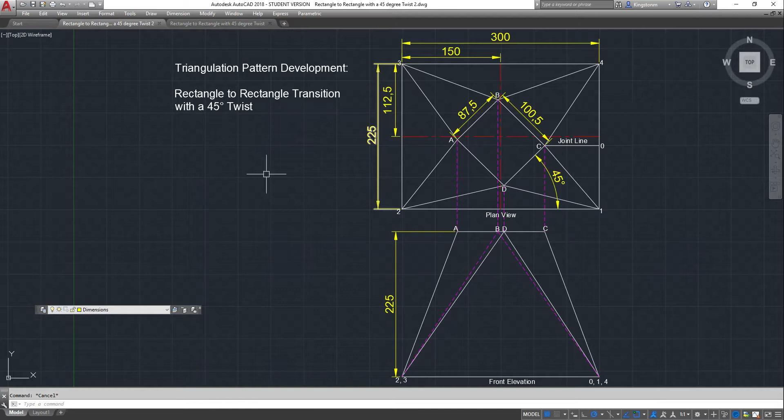I'm just doing the pattern in one full piece because that's how I want it drawn. But you would have to make it in two halves and either butt weld it together or spot weld it together or join it, however you so choose to do it. So that's the outline. I've already redrawn it here.

I've started to put my true length lines in. You will remember having drawn some of these already, or you may not remember that these lines here, say from 3 to A in the plan view, must be put over the vertical height or the true length height in the front elevation.

So what we do is we take that length there. I'm just going to do it with the computer. So it has a length here, that line of 144.54 millimeters. So you would set your compass, your dividers.

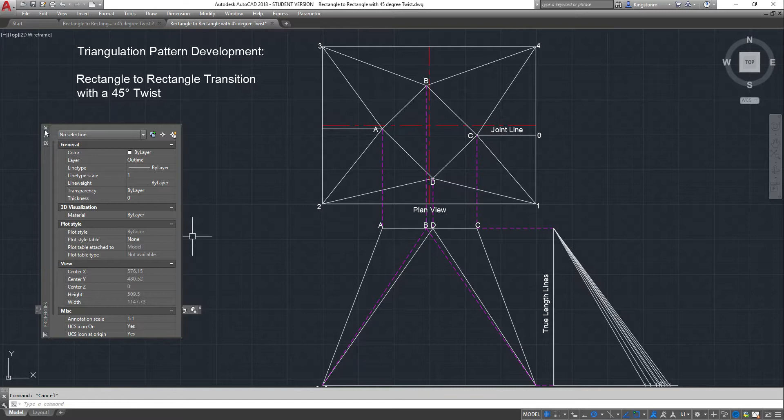And I'll just demonstrate that here. So circle here, what they say, 144.54 millimeters. So you can see the circle, and you would only draw a small arc across the baseline like these little lines here, but on this computer or on an AutoCAD you have to draw a full circle and then trim it back.

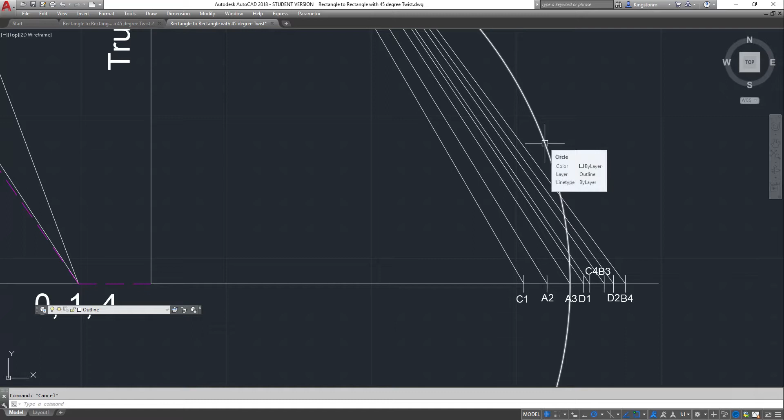So that circle is drawn in from A3, this A3, which is this intersection point right here. We run our line all the way back to our vertical height line, and that gives us our true length line of A3 when it's laid out properly for a vertical height.

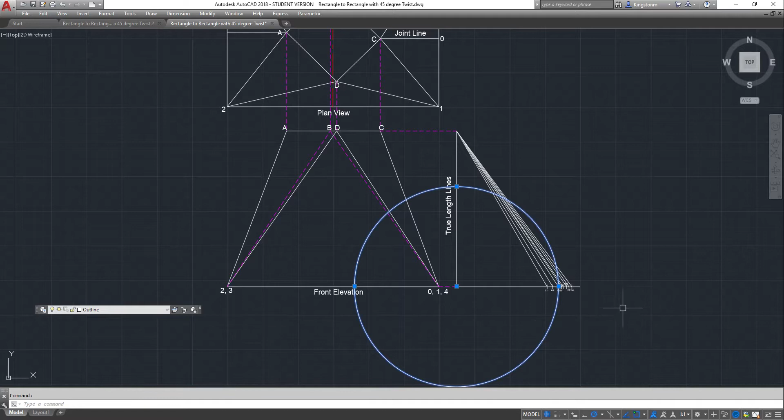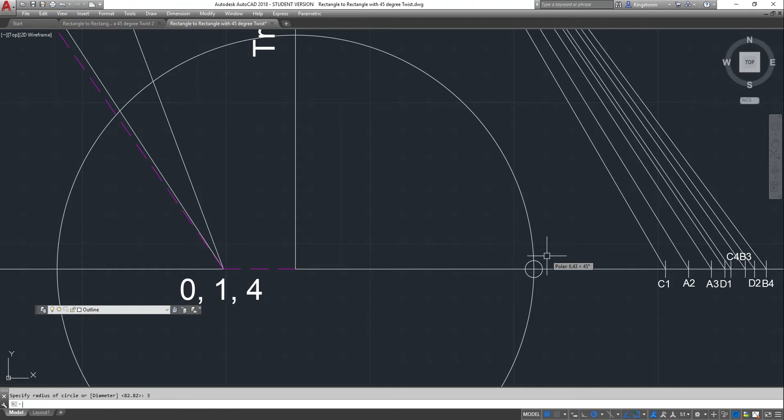So that's those done. I haven't done the joint line. Our length of our joint line is 82.82, and if I draw that in here just to show you, we've got circle here, 82.82, and because I'm doing it on the computer, I have to in AutoCAD just put a small circle there, and trim out from that small circle.

So that's how I achieved my points. I'm not going to number it. I can draw my line from that back to the vertical height. So there's our true length line, or true length of the joint line. That's the plan view. The vertical height is there, and that is what we derive for the true length line.

If we look at that, it tells us that it's 239.76 millimeters long. In actual fact, it's already on the plan. There it is, exactly the same length, 239.76.

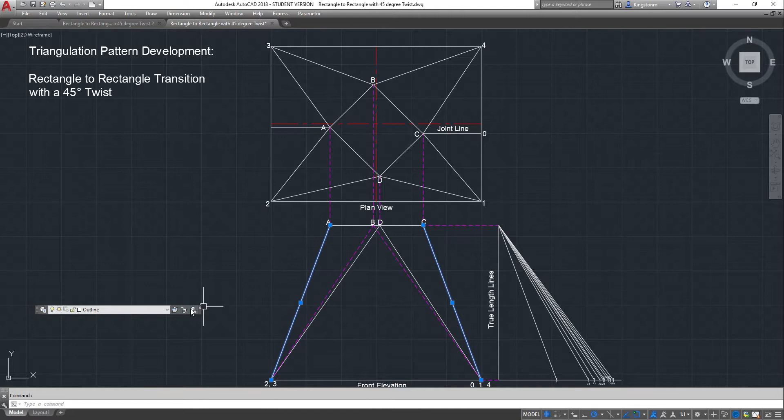Reason being, you might remember, the two outside lines on the front elevation are always true length lines. They're not the true length of the corner ones because they are a different triangle, but they are a true length up through the center. So we can determine, take those two lines directly off the plan, and they are true off the front elevation, and they give us true length.

So into the development, we've already talked for 4 minutes. So we'll just put in a baseline here, 225 millimeters long, and this point on this end, if I take the letter out of here and paste it into here, this is point 2 on this end. Oh sorry, it is point 2, yep.

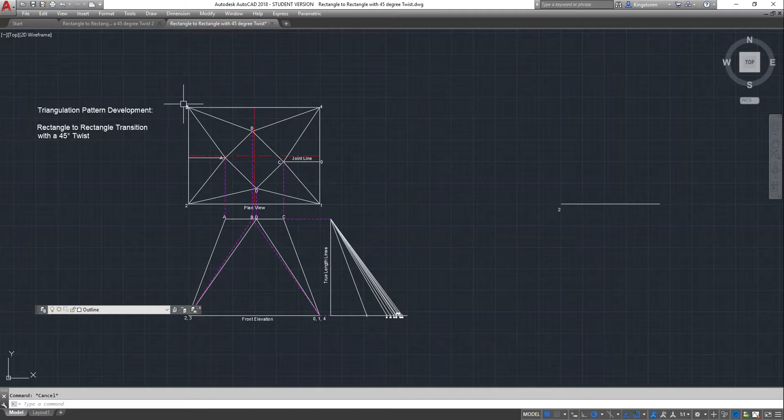And 3 off the other end, clip that out of there and put that onto this end. I'm not going to be too fancy with my numbers this time. I just want to get on with laying this pattern out and try and keep the time down as much as possible.

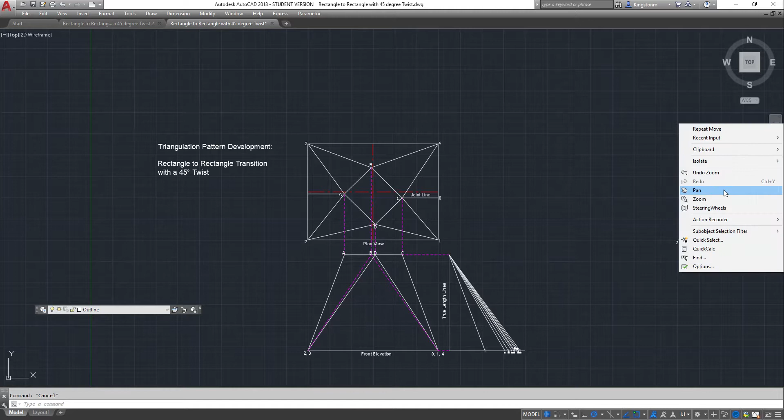The 2 is on the left hand end, the 3 is on the right hand end. The reason being that we're trying to lay out the inside of the pattern. If I had the 3 at this end and the 2 at this end, I would be drawing the outside of the pattern, and I don't want that. I want an inside view of the pattern. So that's why I'm taking it off there.

The very next line we want to put in is A to 3, and then we'll put in A to 2. So because I've taken those lengths and scribed my circles, I can take the dimensions straight off here. So A3 has a length. I need to write this down because I started to do this drawing before and made a fool of myself, as I'm prone to doing.

267.43. And if I click off that and click on A2, it tells me it has a length of 263.22. You can check that on the properties box by looking at the length figure.

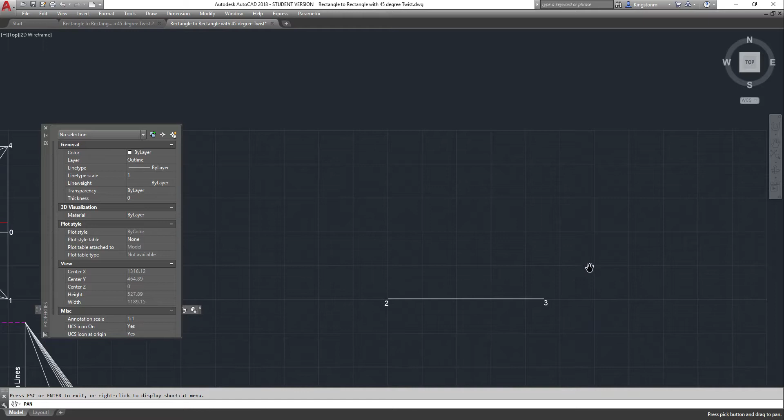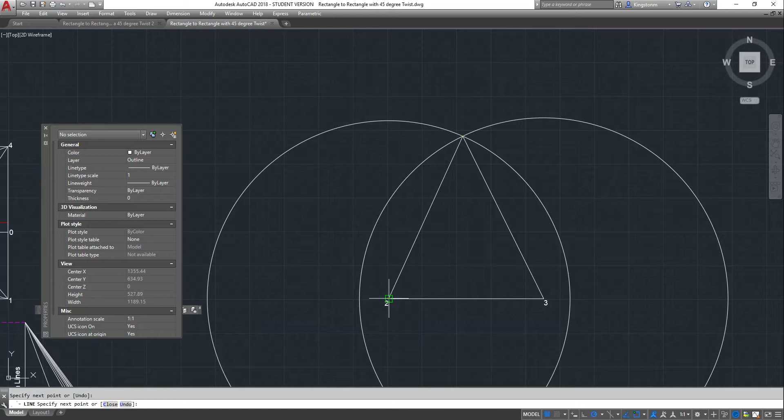So I have to scribe full circles. You only have to draw small arcs to actually do this drawing. So from A to 3, I draw a circle which is 267.43, and from A2 I draw a circle at 263.22, and there's my intersection point at the top. So I'm going to draw a line from there up to there and back to there, and that's my first triangle that I'm trying to do. So that triangle there, get rid of that, is that triangle from A to 3, 3 to A, A to 2, and 2 to 3.

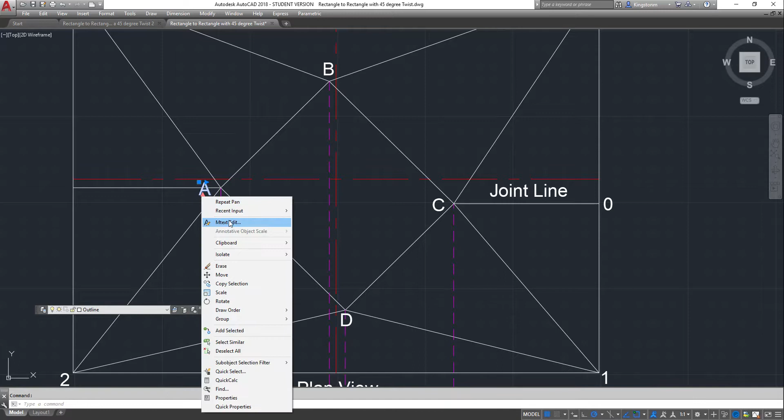So that's laid out there. So we'll take the A off the drawing, copy into here, paste. So there's our A.

Incidentally, you can see that the A position is offset from the center line ever so slightly. So if we take a distance from 2 up to that line there, you can see down here I've offset it slightly when I've measured it. It's 107.55 millimeters.

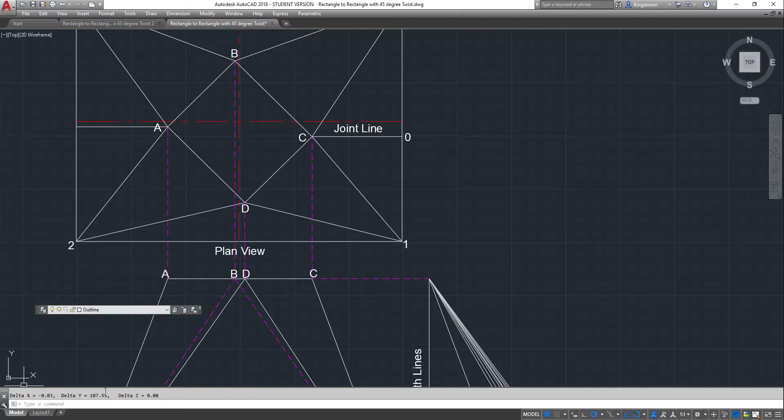107.55. So if we go across to this drawing and we lay in a line from the top, from the apex of that triangle - have I drawn it from the apex? I have. And we come back to there, and then I measure the distance from there across to here. You can see we've got 107.54.

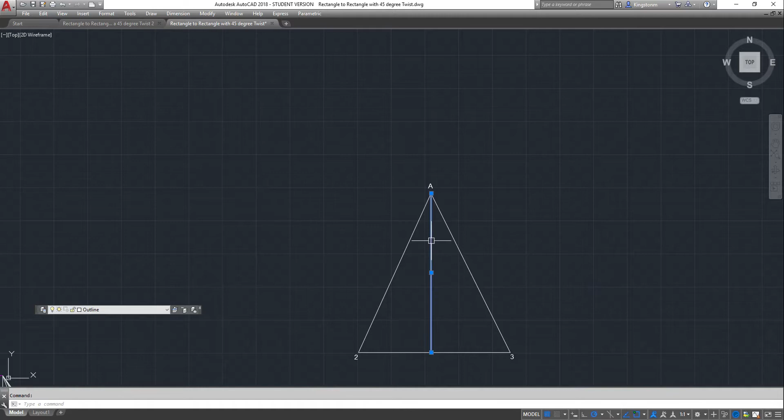I'm just not quite hitting the button correct. I don't want to spend time on it, so that tells me that I've actually offset it to the correct side. The triangle is more to the A2 side than it is to the A3 side. So we're starting to lay it out right.

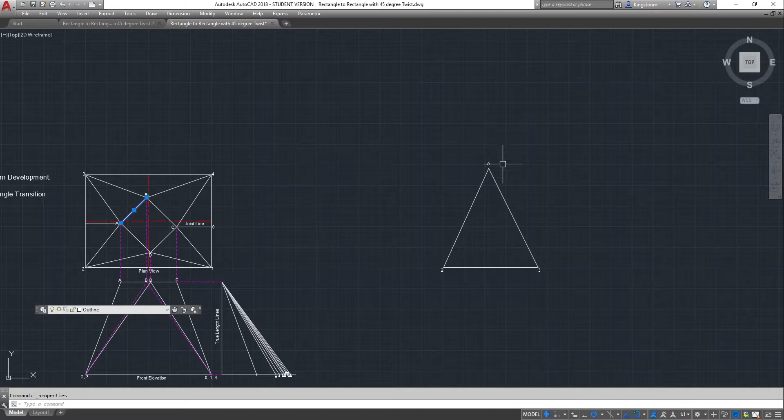The next line I want is from A to B, and that distance was 87.5, I believe. There we go, 87.5. So from A to B, and that's on the 3 side. So I'm going to draw a circle from there. So I've got 87.5.

And that line there is 3 to B, so I take that and I come down here and I draw a circle. What did I say it was? B to 3, 3B. So we've got, this is it here. So click on that and we have a length there of 273.97.

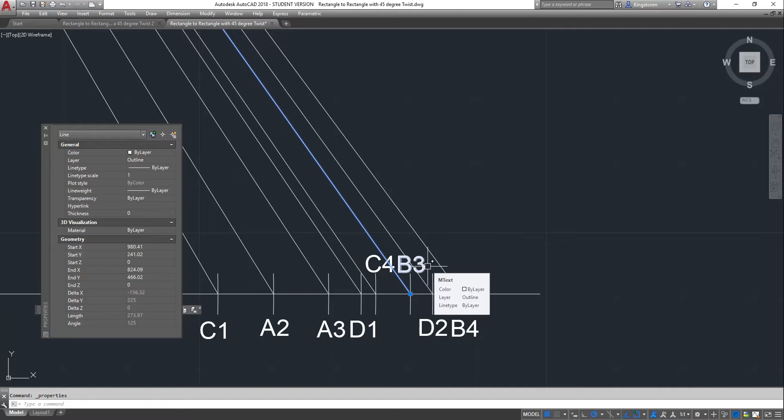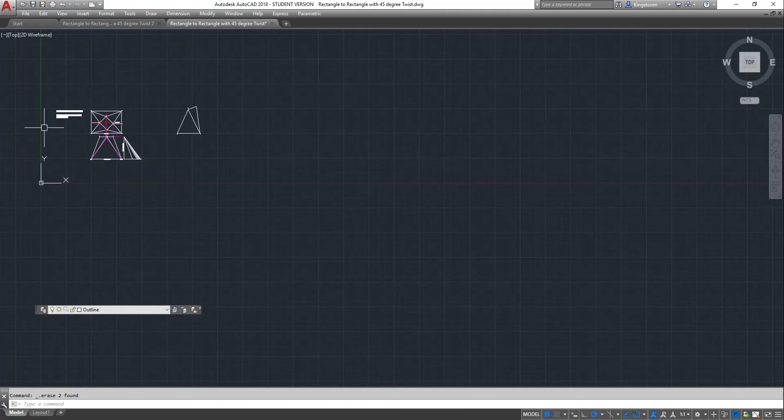So going from there, drawing my circle, 273.87. There's our intersection point for that line, and back to there, so I can get rid of those 2 lines already, and that is point B. Get rid of this thing sitting on the screen, so take off B, copy that, and into here, placing that on the screen there at B. So that's our point B.

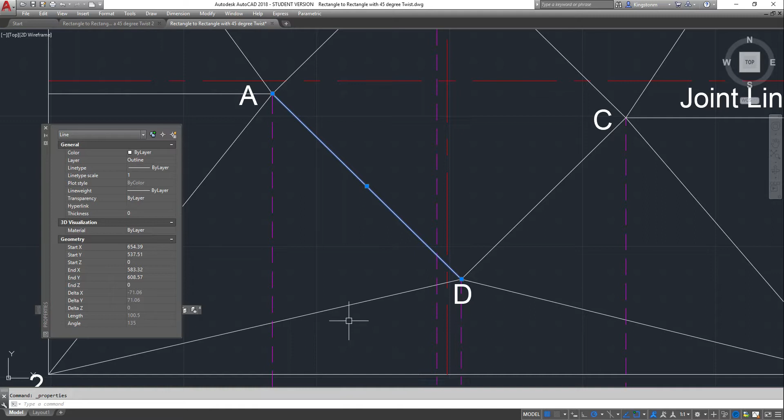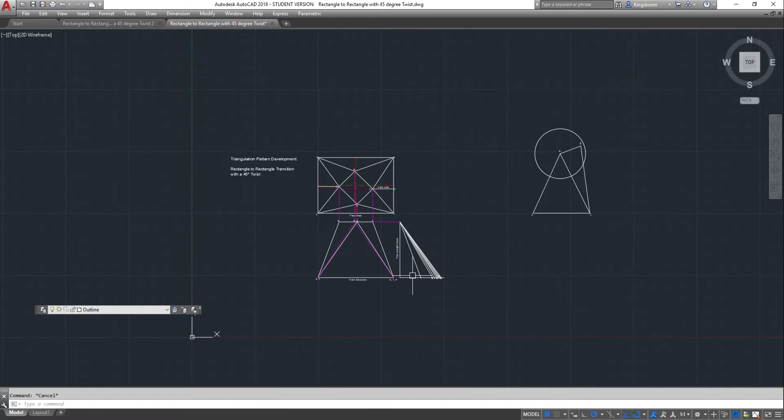Come back out the other side, we want D. The length of D should be, what is it, 100.5 millimeters. So A to D, circle from there, 100.5 millimeters - you can see it right down the bottom of the screen in the command bar, laying it in. And that line there, we want 2D, so we've taken that length down to here, which is 2D. This is 2D here, and the length of 2D is, I'm going to write this down again, got 275.84.

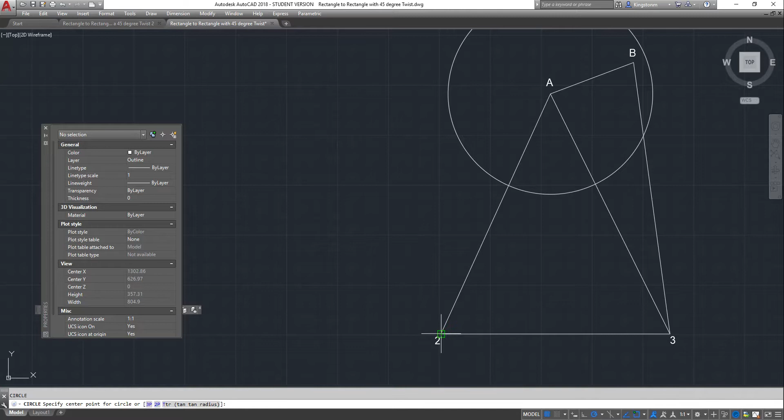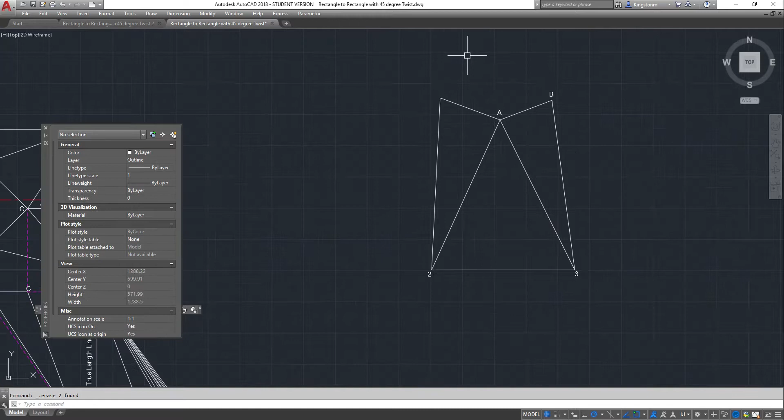So going from 2, drawing a circle, C for circle, and I said 275.84. So there's our intersection point. Draw a line. Do it again. From there and across to there. Get rid of these circles here, no longer required. And that's point D.

Get rid of that. Copy D up to here with D. Paste it. It's Control V - I must remember that, but it doesn't always stick it where I want.

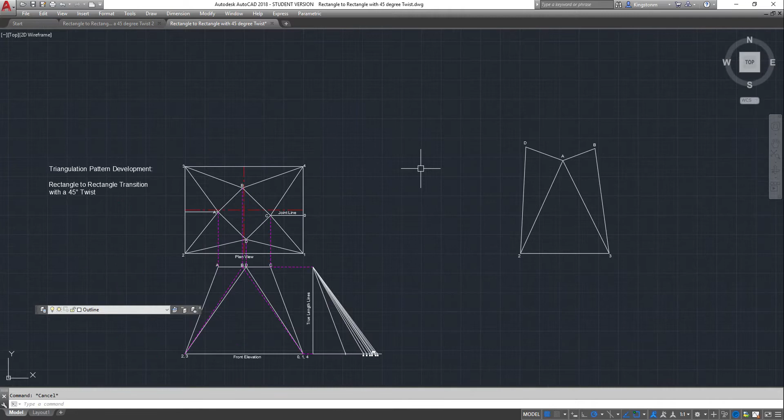Right, so the next line we want is from 2 to 1 and 3 to 4. They are 300 millimeters long. You'll remember from the previous drawing, there's the 300. So we want to scribe 2 lines from that corner, 300 millimeters out one side and exactly the same out the other side. Currently it's just a line. We've got to determine the points.

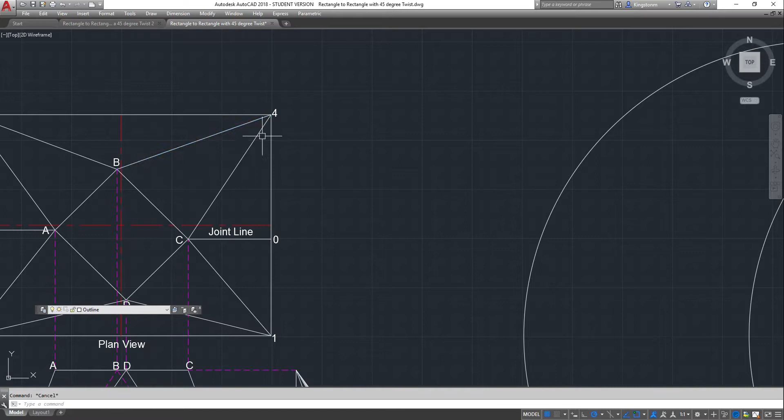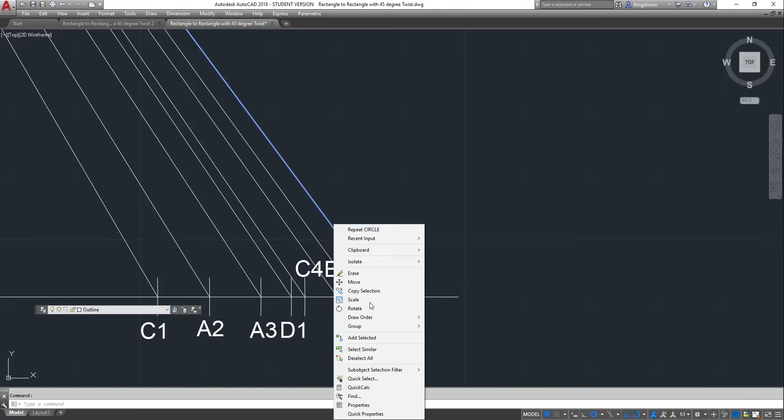And what we need is from B back to 4 this time. If we go on this line here, it's this line here, so this is line 4, but we want the line from B because we've already got B on the sheet, as you can see in the top corner there. So we need to go from B and determine where point 4 is. So B4, it's the longest line, so the longest one measures 278.2, writing it down, 278.2.

So coming back into here, B, scribing a circle. Circle starts with C, not B. What did I say? 278.2. So there's our point.

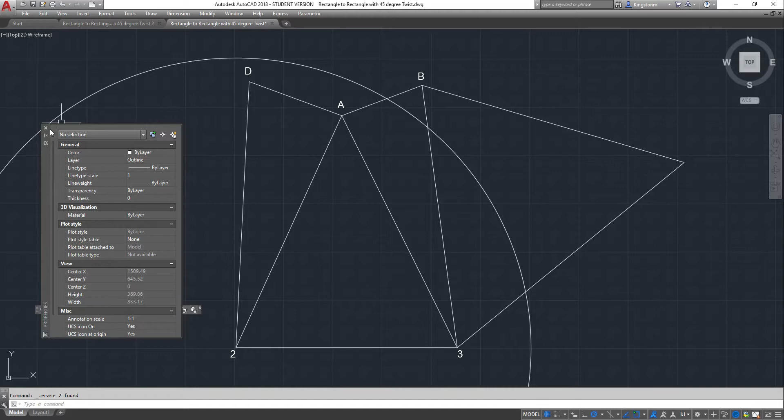Going to draw our line from 3 up to 4 and back to B. There we go. So we can get rid of those 2 circles. That's point 4. Go and copy point 4. Trying to do this as quickly as possible, of course. There's our point 4. Paste it.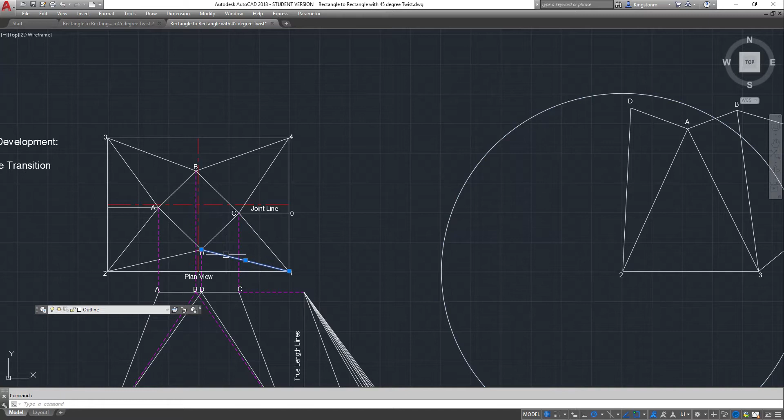Point 4. Now coming out the other side, we want, we've got D. This circle is actually the radius - the radius is 300 mils, so we need to determine where point number 1 is. So the line is D1 that we're looking for. We take that length, scribe our circle, and here is D1 here. So this line here is D1, and it is 269.99. So just writing that down.

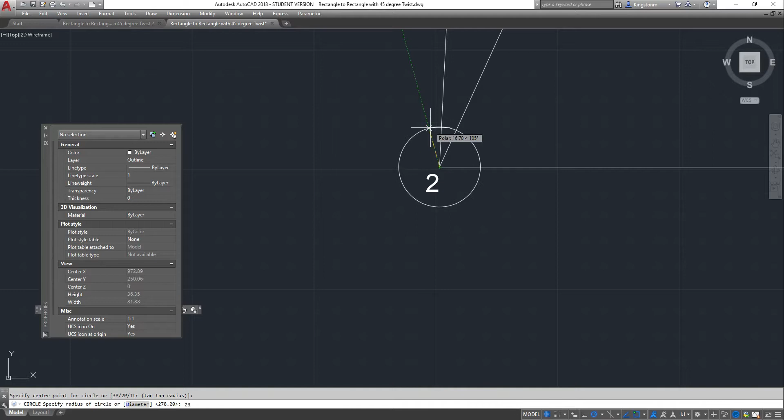So from that point, 269.99. No, I did the wrong thing, like a fool. It's got to go from D, doesn't it? Easy to make a fool of yourself when you're doing these things.

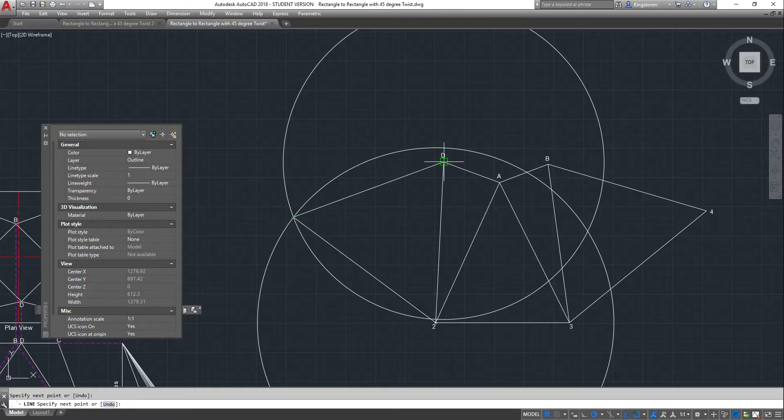269.99. There's the intersection. Draw a line from point 2 to point 1, and back to D. We can now get rid of that circle and that circle, and get rid of this properties box.

Dancing all around here on the screen. We want point number 1. We're going to copy that, lay it in here, paste. So there's point number 1. From D we want to go to C, it's 87.5 millimeters, so we're going to scribe a circle from there.

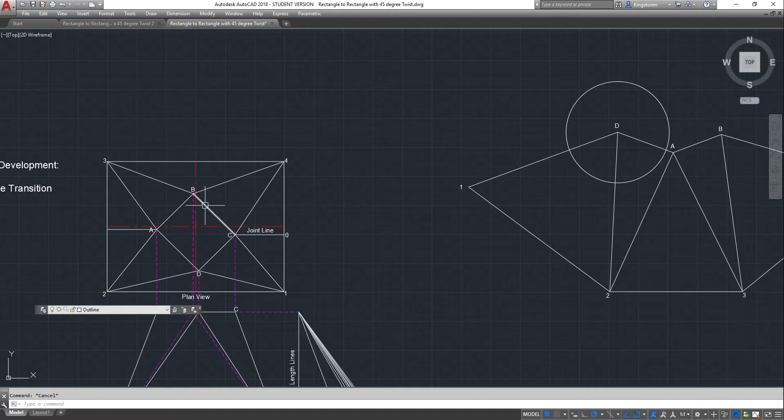Circle from that point, 87.5 millimeters, and the line from B to C is actually 100.5, so we're going to scribe a circle from there. That's 100.5, so there's our 2 circles. Now we've got this line, we've got 1 to D.

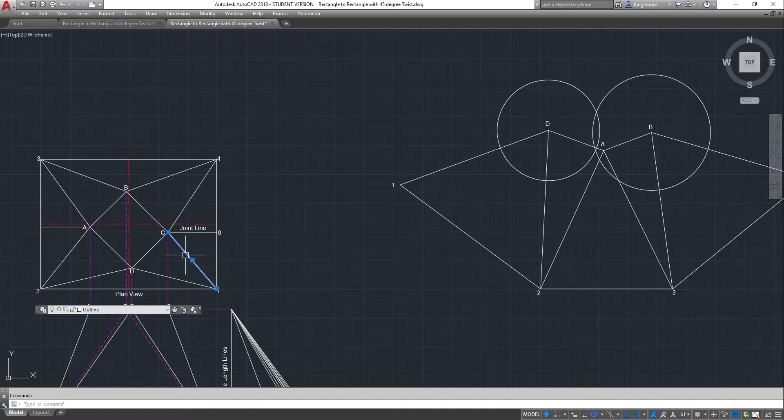We've scribed in circle D, C - that circle, this length here is the radius for this here. So what we want to fit is from 1 up to C, and that'll determine where we hit this actual circle here. So from 1 to C - where's 1 to C? It's the shortest one here. It has a length of...

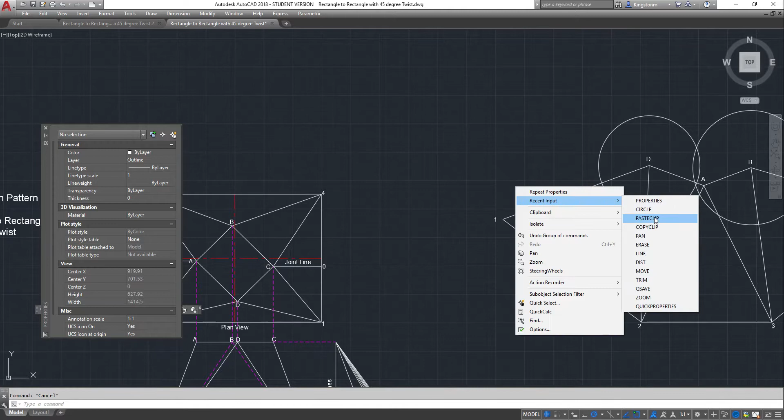259.15, just writing it down again. So from there we're going to draw a circle, 259.15, and that's our point. So we're going to lay those lines in, across to there, back down to there, get rid of those two circles.

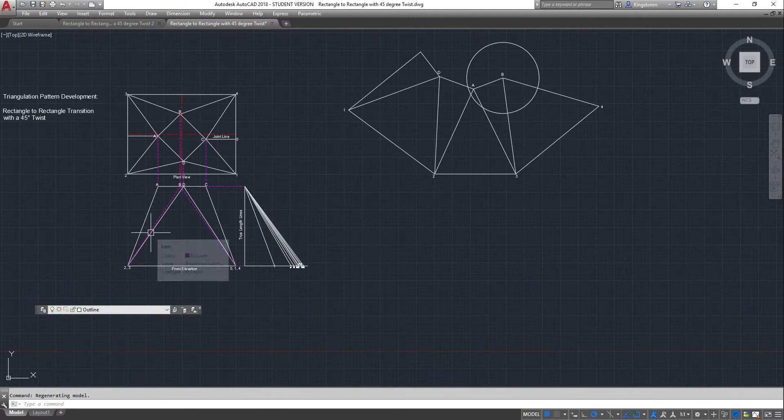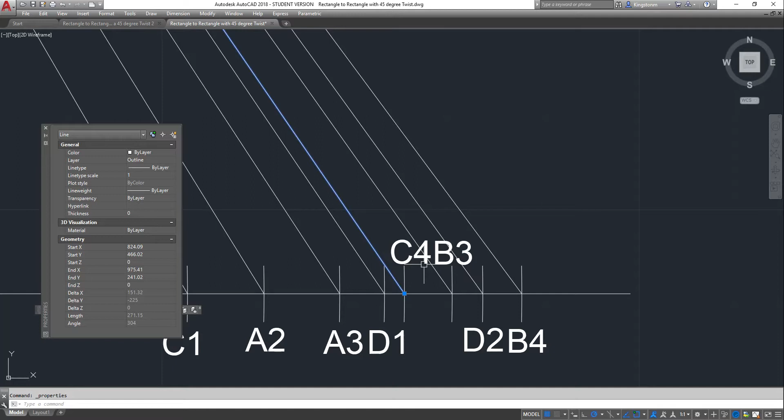We've got our intersection, and out on the other side we are going to do from point 4 through to C - this line here, so C4. Where's C4? So this here is C4 at this point here, so properties on that tell me that it's 271.15 millimeters.

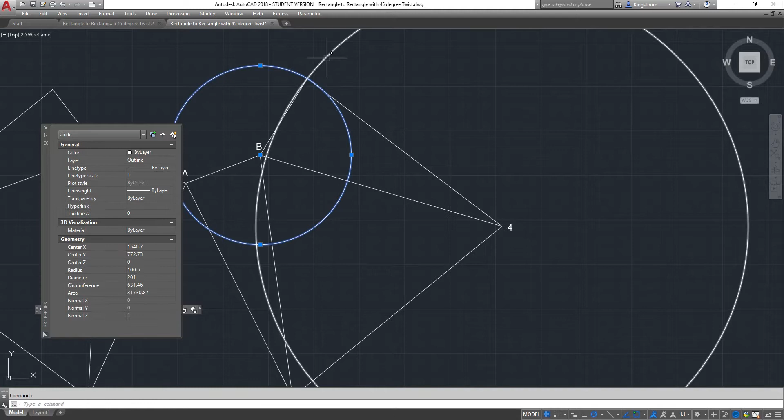So C4, going from point 4, circle - 271.15. That's right. So drawing that in, we've got 4 up to C, back to B, get rid of those two circles or arcs. So I can take the C off the drawing.

It's going to go into 2 places now because that's the joint line and it meets at 2 points. So C into here, pasting C at that point there and also at that point there because it's the joint line, as I said. What do we need to do now?

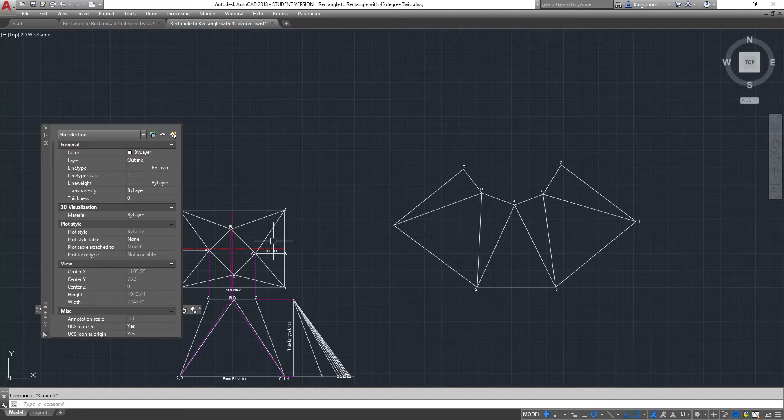We need to create these last 2 triangles in here with the baseline. On one side we're going from 4 to 0, and I'm going to take that dimension directly off the drawing. From 0 up to 4 gives me a length of 126 - need another piece of paper.

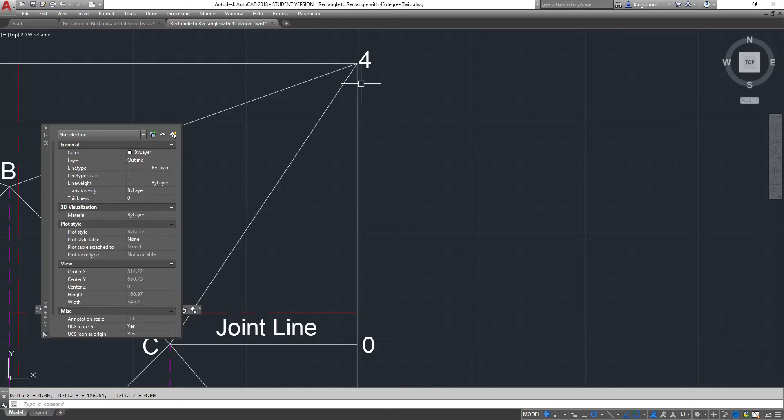126.64. So I'm going to scribe an arc, from 4 to 0. So here's 4, and I'm doing a circle. So circle, and I said it was 126.64.

And what we need is that length there, which is the joint line, going from C back down to 0. And we can take that directly off the drawing here. As I said, I haven't numbered it down the bottom, but that's what it is. There's the C up the top, 0 down the bottom, so we can take it directly off that point there, and it is...

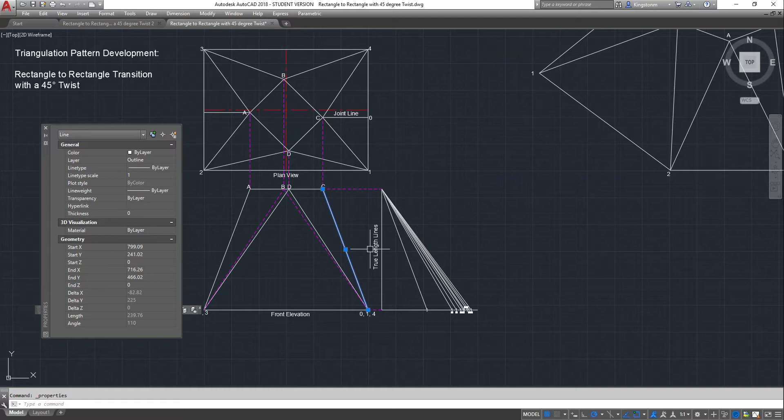239.76. So 239.76, circle, going from there, 239.76, and we can draw our line in to there, back to the top.

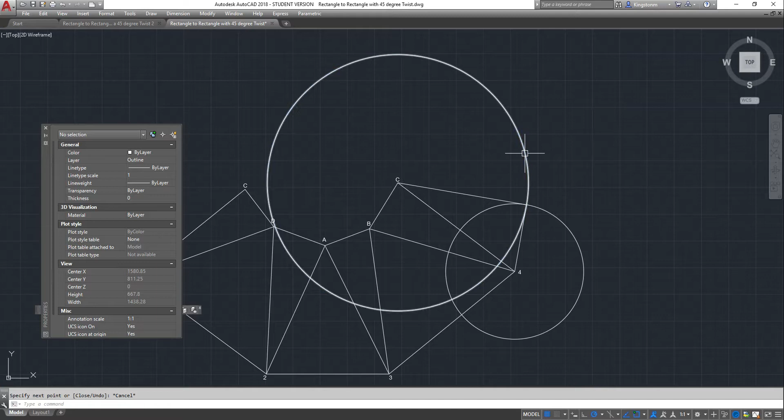Get rid of that. That length there is actually also the same length that comes out on the other side of the pattern from C on the other side. So we're going to draw a circle again from there. I said it was 239.76.

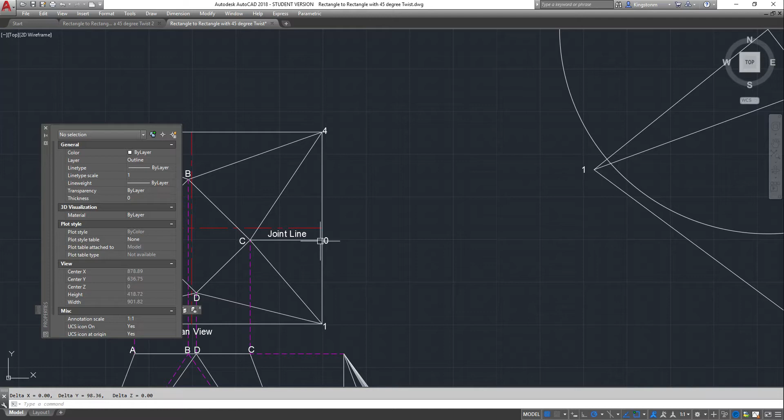There's our circle, and this time we want the distance from 1 up to 0, and it shows it on the screen at 98.36. You can see that right down in the command box down here, delta Y 98.36. So drawing a circle from 1 up to find 0 is 98.36. There you go. And line, 19 minutes.

Gosh, time flies when you're having fun.

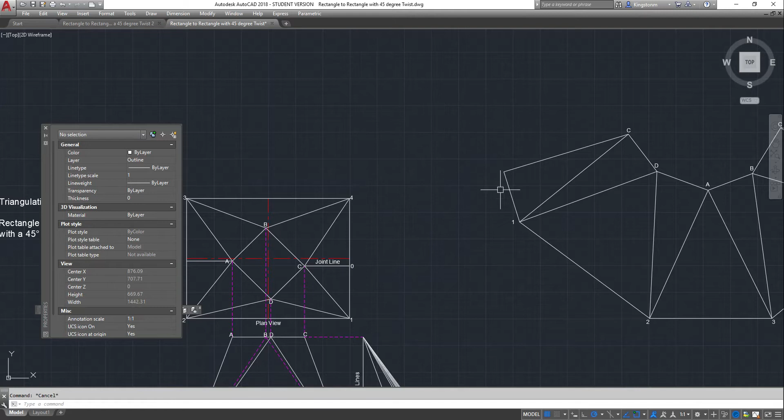Up to that point there, and that's point 0, so we're going to copy that out of there. Copy, laying that into there. There's point 0, out the other side because it's the joint line, and it's exactly the same size out the other side.

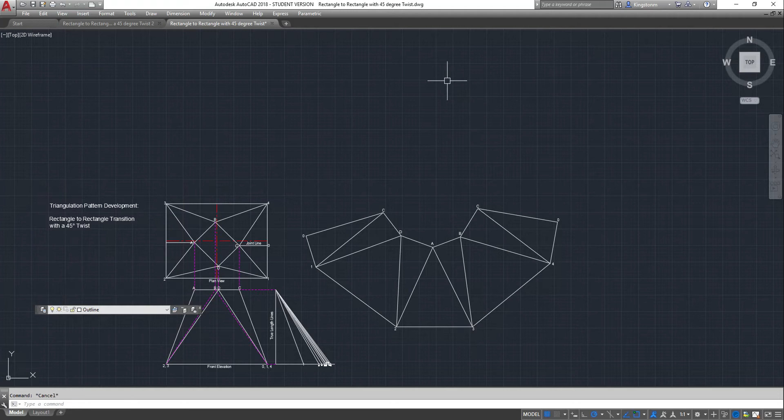So there's our pattern. Move it slightly, leave all that information down into here. Get rid of that. Blow it up to full size. The corner should be 90 degrees, so if we do a dim angle, this angle in here is 90 degrees, as you can see, which tells me that the pattern is correct.

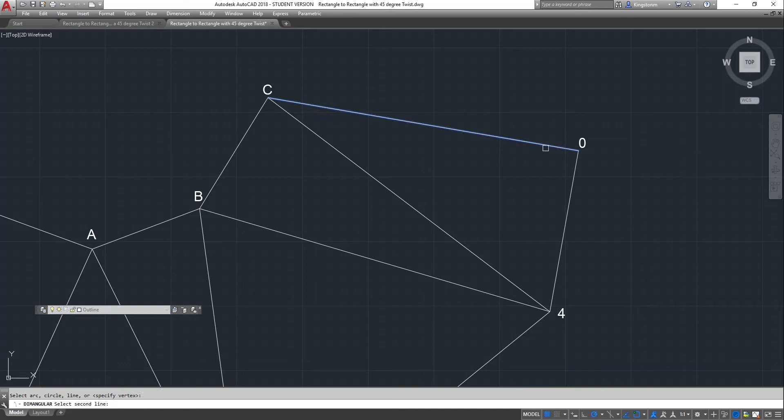We'll do exactly the same on the other side. Dim angle again, repeat dim angle, and there's our 90 degrees. So you can always check your patterns - they should be 90 degrees in the corners if you've drawn them accurately.

So that's the layout for our original drawing. Done our pattern, numbered it all correctly. Crucial that you number everything whenever you do a pattern, otherwise you can get awfully confused as to where you're going. Just check it by measuring the corner on the last two angles.

They should be 90 degrees. If they're not 90 degrees, your pattern will be wrong. If they're 89 or something like that, that's not too bad, but if they're 5 degrees out or something, you've got problems and you need to sort out what the problem is.